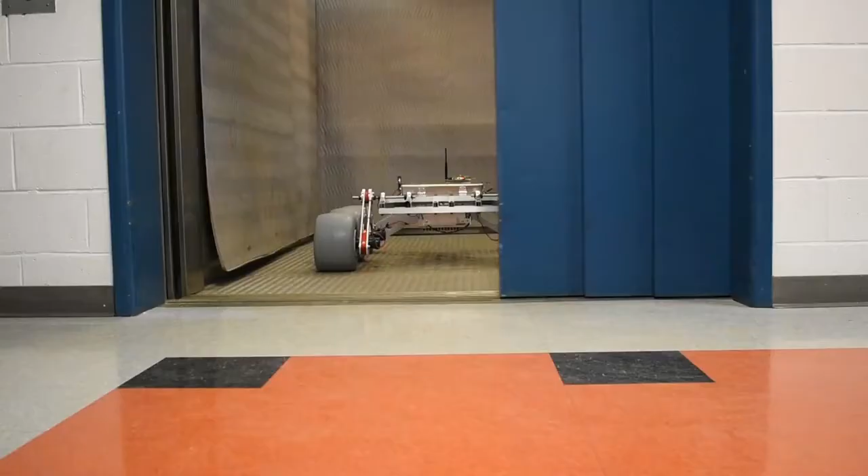Hello, we are the Stony Brook Robot Design Team based in Long Island, New York. This is our first year competing in the University Rover Challenge, and our very first rover, Triton.

The mechanical team's goal this year was to have a durable and dependable rover capable of traversing rough terrain, performing specialized tasks, and collecting soil samples. The team is broken up into three major subsystems: chassis, suspension, and arm.

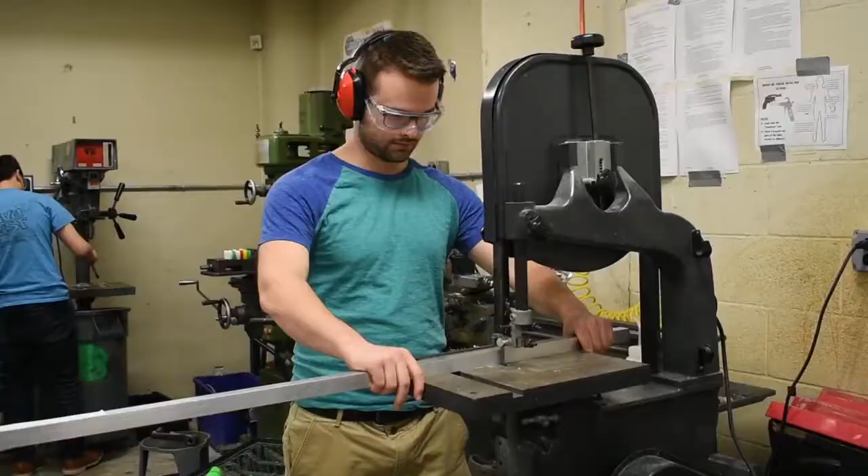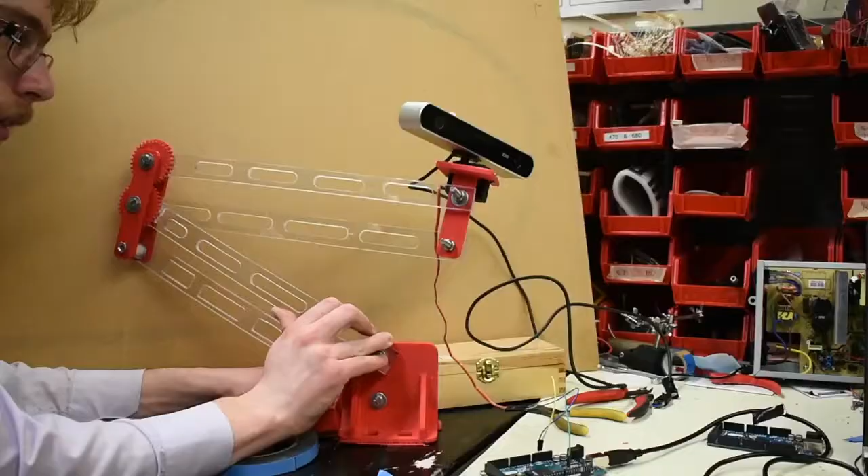The chassis of the Triton was designed in SolidWorks, and the main frame is made with square aluminum tubes due to its ability to be machined, assembled, and modified easily. The shape of the frame minimizes the use of tubes to decrease weight and to only provide supports wherever needed. A notable component of the chassis is the camera stand, which can be raised to provide optimum viewing angles or lowered to keep a low center of gravity while climbing up steep hills.

The rocker bogie suspension design enables the rover to go over large obstacles, which are more than half the wheel's height. On the suspension, the legs were optimized for weight, strength, and shape using finite element analysis and then CNC'd from aluminum.

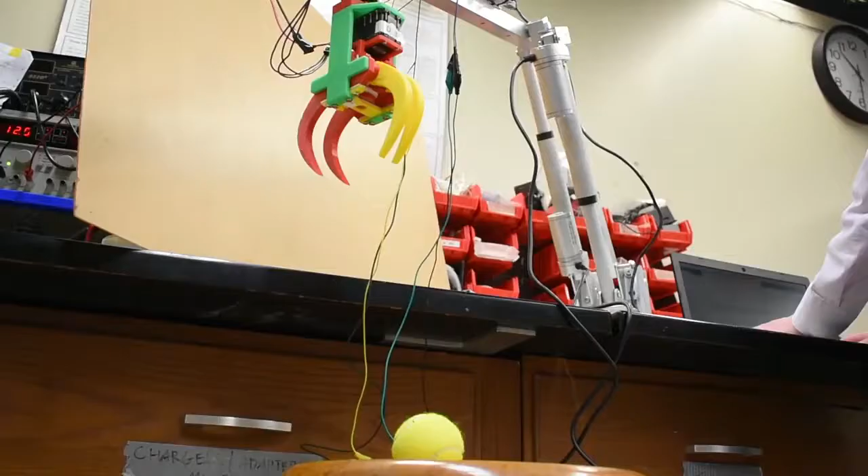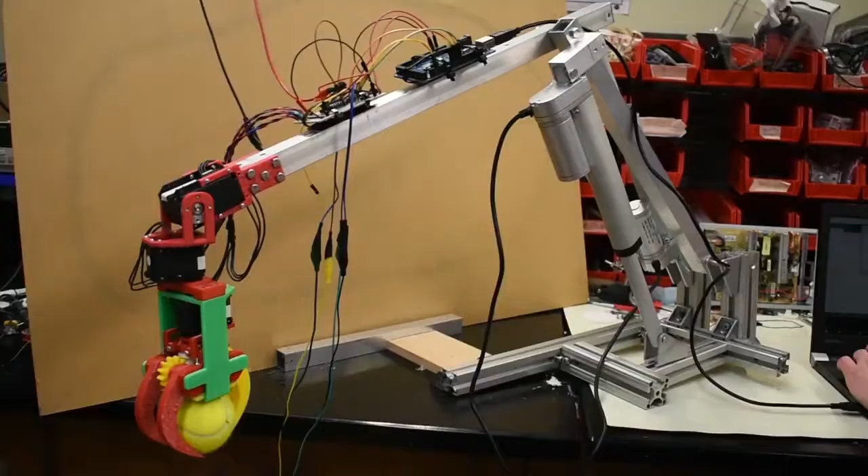Triton's arm has 6 degrees of freedom, providing it with the dexterity to tackle the extreme retrieval and delivery task and equipment servicing task. We chose to use linear actuators instead of motors on the arm because the actuators can be placed at a lower position on the arm, which uses less power to lift.

The rover's custom designed hand uses high torque servo motors to allow greater resolution of movement. The hand also has a worm gear to lock onto objects and maintain its grip without powering the servo.

This year's electrical system was designed completely in-house because of our requirement for Triton to be both reliable and robust, which we were able to achieve with our unique long-range beacon mode and 518 watt-hour lithium polymer battery solution.

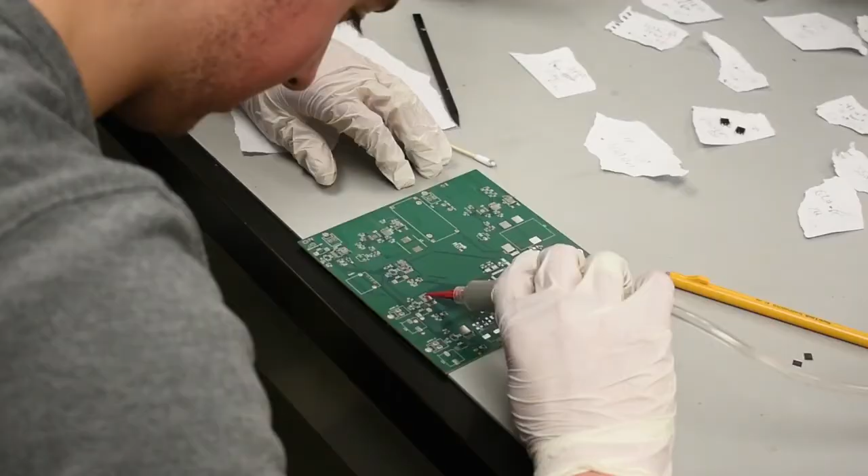The power board introduces 3 individual step-down voltage regulators for all of Triton's peripherals. Thermal design was a major concern for us this year, which is why our power board is 4 layers, and our electrical box design provides ventilation for convection airflow cooling.

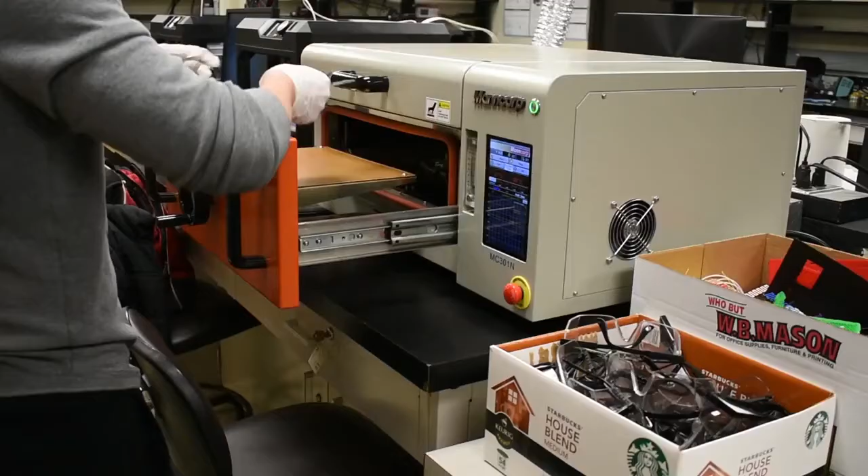Triton's drivetrain uses 6 brushed DC motors with Hall effect encoders and 3 dedicated dual output H bridges. The brush motors accommodate a simple movement scheme, and the encoders serve as feedback for Triton's PID control loop algorithms.

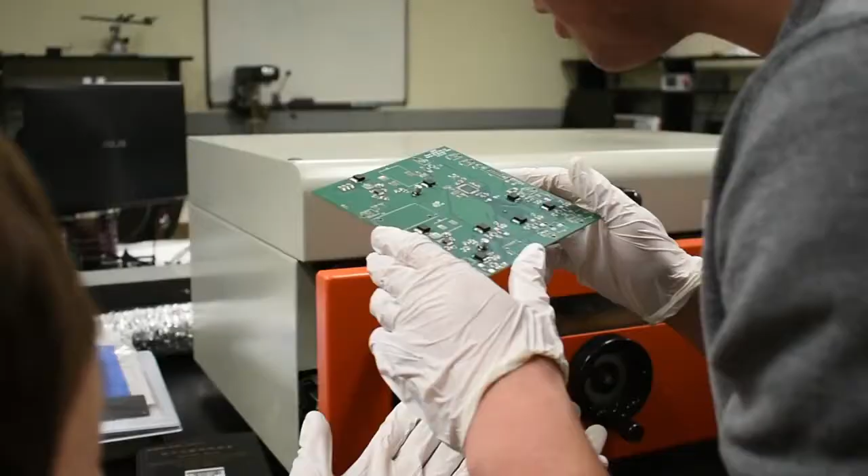The onboard PCB is both versatile and modular, as it incorporates control for the linear actuators, servo motors, and bipolar stepper motors we have on the rover.

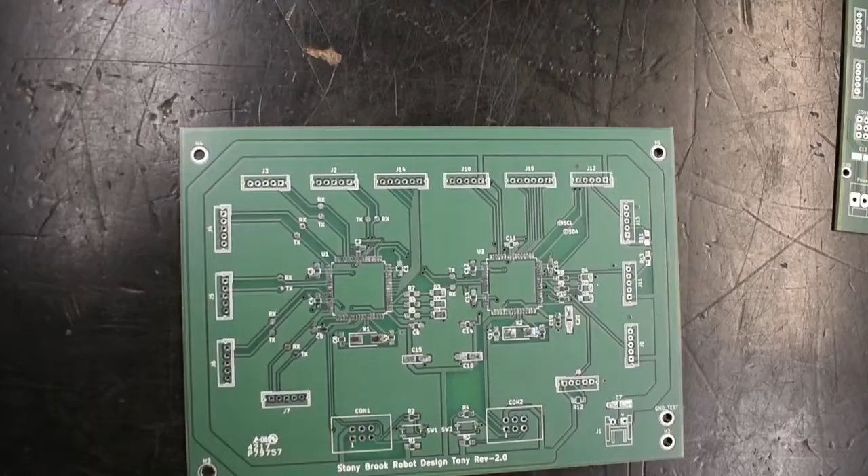Triton's sensor board design integrates a GPS, inertial measurement unit, and various other data acquisition peripherals. We achieved this using a single Atmel-based microcontroller capable of handling high-speed serial communication and high-fidelity analog measurements.

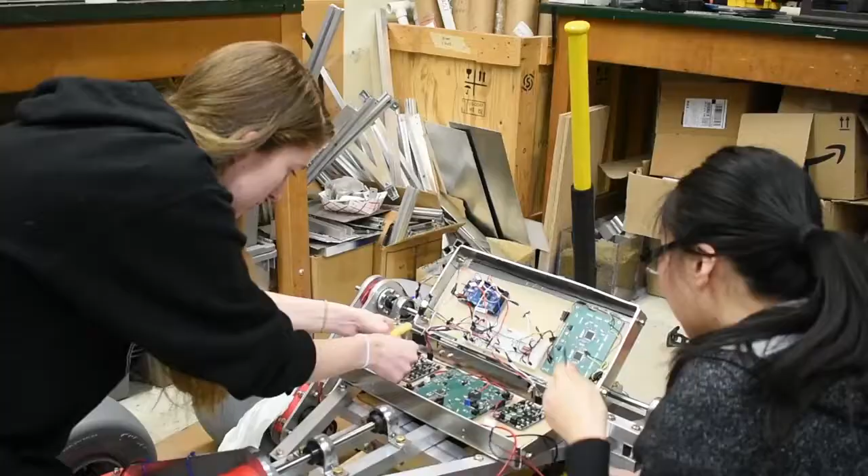Finally, Triton's communications system integrates an extremely unique and robust low-power, long-range beacon mode. This is crucial to ensure the rover can be communicated with in areas with no line of sight.

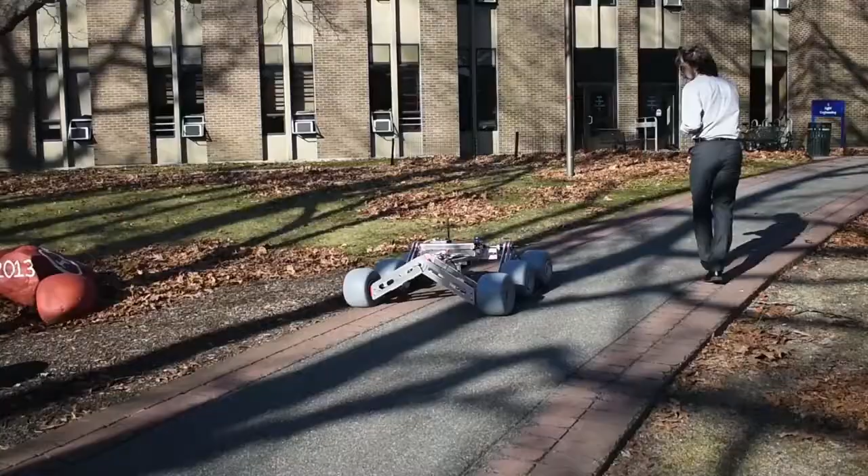We developed our software design with a focus on simplicity and efficiency. Using the ROS framework, our overall system is divided into several independent subsystems that work and communicate with each other. The system is able to quickly detect communication loss and corrupted data so that the rover can continue to function in any circumstance. We also use 2 radios for additional bandwidth and redundant safety protocols.

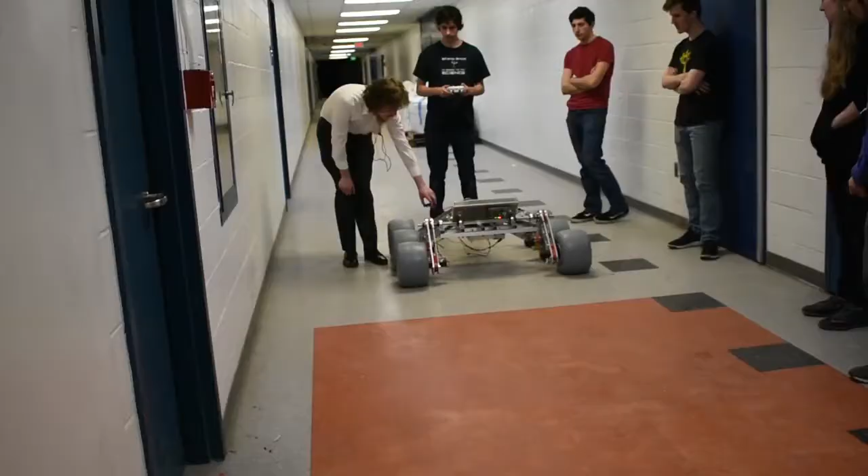Triton's control system uses an Xbox controller for movement and a joystick for arm control. Our rover uses the ROS framework for most of the software subsystems. It allows various nodes to be tested and developed independently. We have also developed a user interface using RQT for data visualization.

Our vision subsystem is implemented using a ZED camera. The main vision processing is done on the rover with a Jetson TK1 SoC, using a modified ORB-SLAM algorithm to create a 3D point map and localize the rover.

Triton primarily uses its vision and GPS systems for the autonomous traversal task. The rover navigates towards the target GPS waypoint and avoids obstacles that are identified using the ORB-SLAM map.

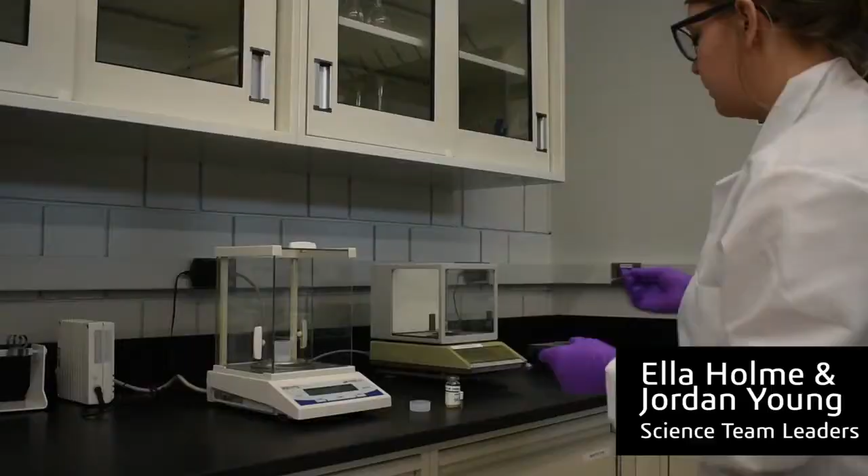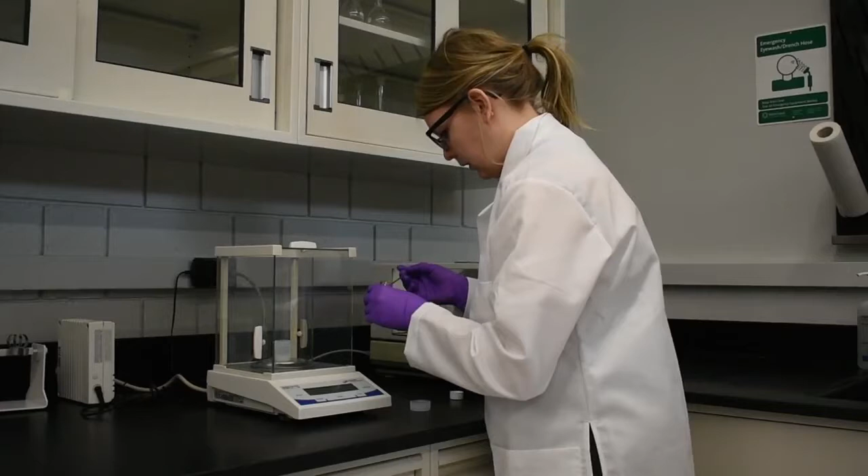The science for Triton was developed through extensive research and consultations with professors who are currently working on the Mars 2020 rover. To accomplish the science cache task, we will focus on the detection of liquid water and deconstruct a sample's chemical profile to determine its potential to support microbial life.

The drill and collection blocks provide a system for taking and storing soil samples without contamination. The camera attached to the sampling arm will take photos of the sampling site.

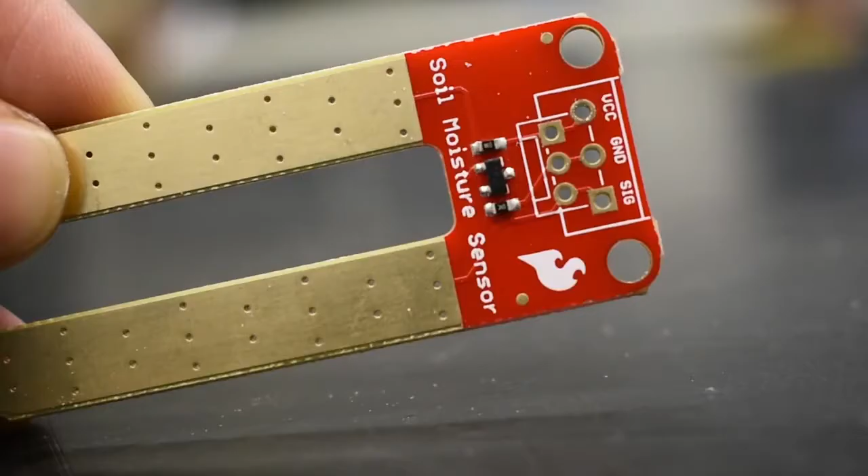Sensors on the rover will collect important in situ characterizations such as temperature, relative humidity, UV intensity, atmospheric pressure, and sample spectra. The spectra will be taken with a Public Lab's desktop spectrometer mounted on the rover.

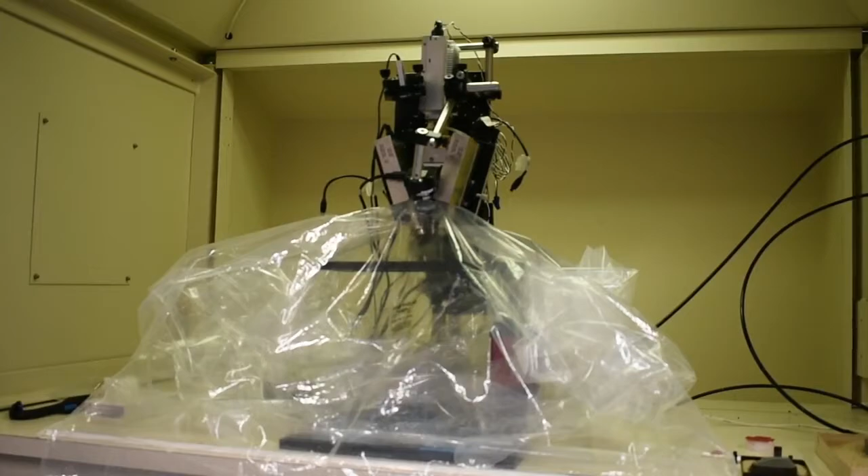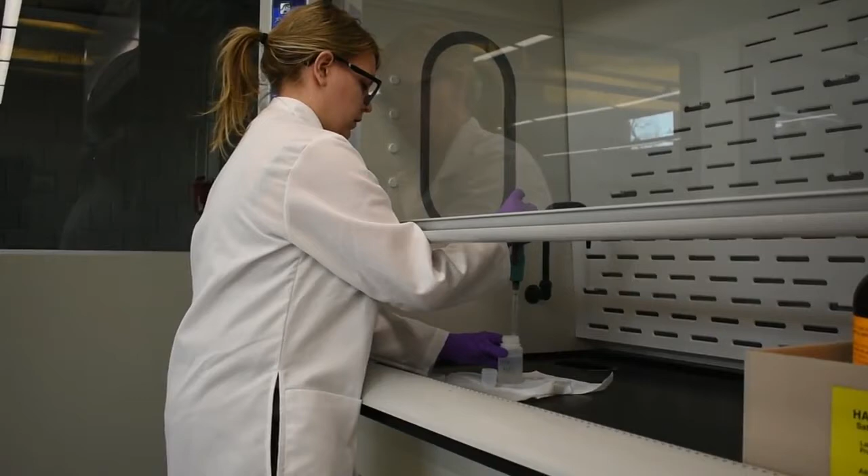For the laboratory analysis, the sample's mineralogy will be observed through a petrographic microscope and contextualized using the in-situ data. Then it will be submerged in deionized water and its pH recorded. Further analysis will be conducted using the Geochemist's Workbench by plotting dissolved species as a function of pH to determine its chemical composition.

At the Stony Brook Robot Design Team, our mission is to challenge aspiring engineers to build the future. We are excited to submit our system acceptance review for consideration towards URC 2018.